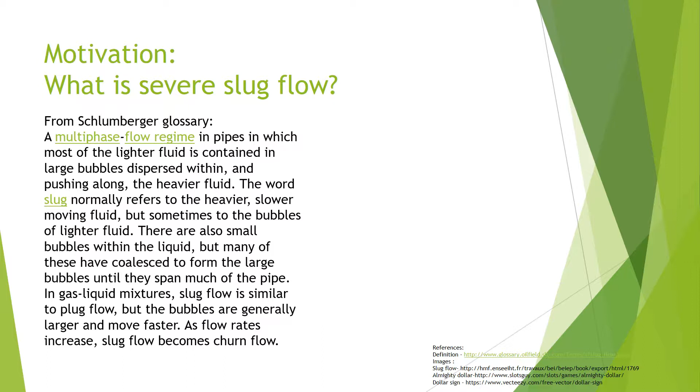So why do we care? Why do we care about severe slug flow? And who here likes Oreo cookies? Well, you should, because they're absolutely fantastic. And if you're like me, you're going to get the double stuffed Oreos, and you're going to pull them apart just like when you were a kid, and you're going to eat that cream-filled center first and then save those two chocolate crackers for later or eat them then.

Well, in the oil industry, that cream-filled center is analogous to our oil production. We love the oil production. It makes us a lot of money. We want to get more of that. That chocolate cracker part is going to be like our gas flow. It plays the part of like a tax return at the end of the year. You weren't banking on getting it, but I'll be dang, you're going to spend it. Am I right? So that's where that falls into play in this scenario. And this is with respect to wells that were in search of oil and not the lucrative gas wells.

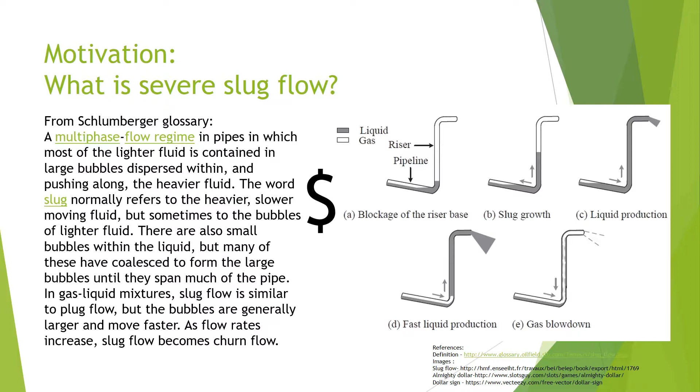We don't want our pipes to break because environmental cleanup leads to money, right? We don't want to go there. Now, last and one of the most important reasons is we don't want to get anybody injured or killed. Why? It leads to money, right? I mean, you don't want to get anybody injured or killed anyway, but even if you're a cold-hearted businessman, that leads into money, and you just don't.

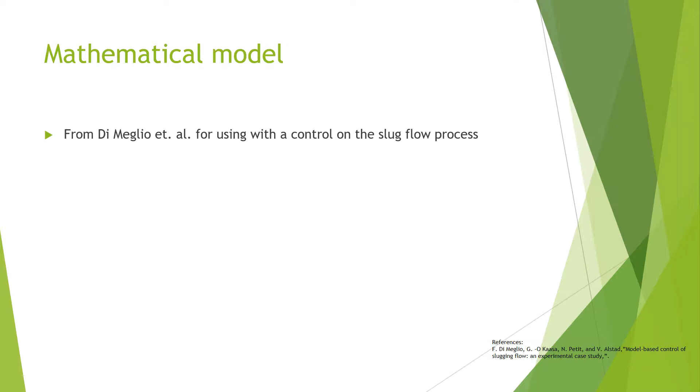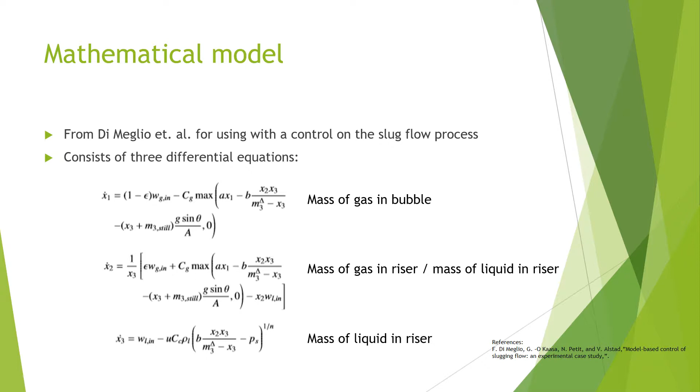So what is the mathematical model? It was developed by Di Meglio et al. It's for use with control in the slug flow process, and these and others like it are for that purpose. It consists of three differential equations. Here they are given to you there. X1 is the mass of gas in the bubble. X2 is mass of gas in the riser divided by mass of liquid in the riser. And X3 is the mass of liquid in the riser.

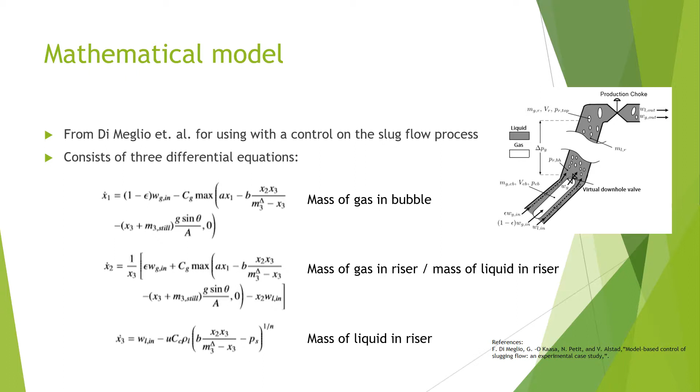So if you look at the diagram on the right, the main principle of this mathematical model is you set a virtual valve down at the riser base, positioned just past the bubble, and it's going to allow the gas to be pushed out, but it's not going to allow any reverse flow to come back through. And this proves vital because this is how it produces the slug flow. When the pressure in that bubble gets larger than the pressure at the riser base, it's going to let go of the gas all at once, and then you have your corresponding slug.

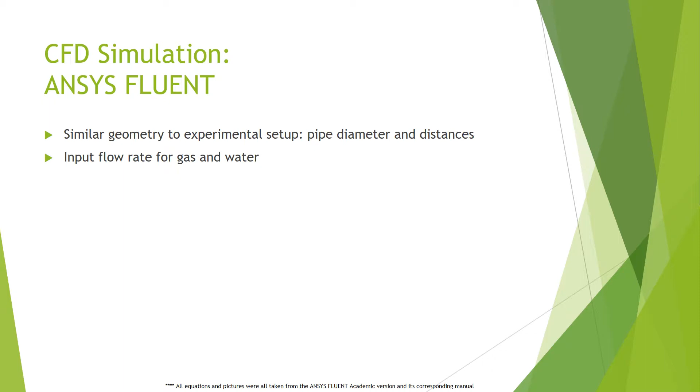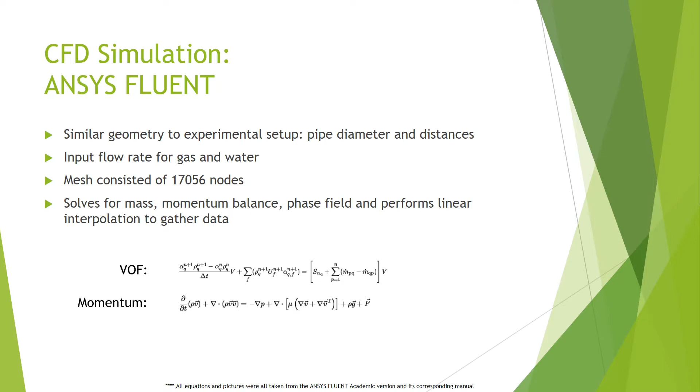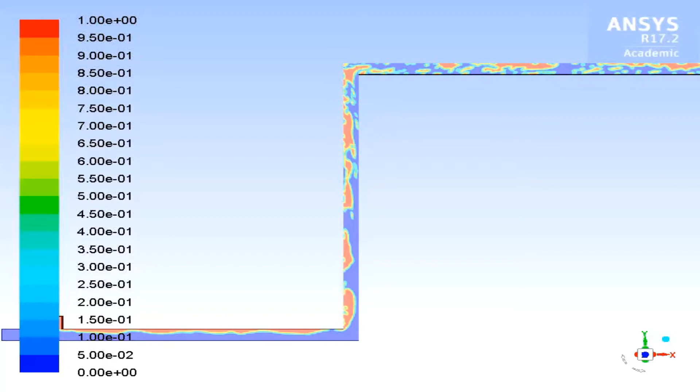What did it look like? Well, there it is. If you look at the riser portion, you can see you have the slug flow and the gas bubbles coming up. But if you take a look at the bottom on the horizontal portion, you can see a separation between the gas as it's moving along. The red corresponds to all gas, and the blue, pretty much a no-brainer, corresponds to all liquid.

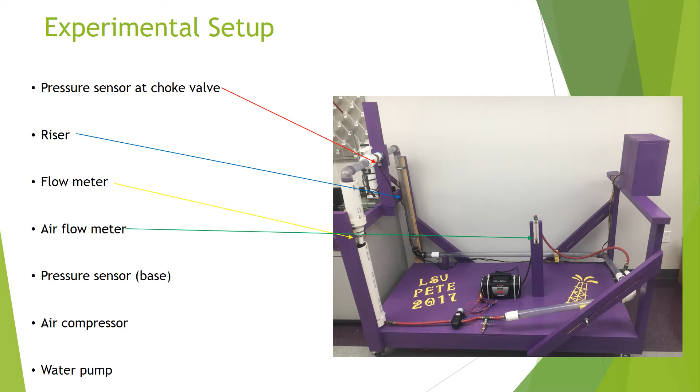So the experimental setup. We had a pressure sensor at the choke valve. There's the riser, a flow meter there. The air flow meter had a valve on it, so we could adjust the injection rate of gas to whatever we wanted. And then a pressure sensor at the base, air compressor, and water. It looked like this. You can see the Taylor bubbles coming up and the trailing bubbles coming in behind them, and the oscillations of production at the top. All those wires come into the box on the right, hooked up to an Arduino Mega, which, using C++, interpreted the data from the sensors.